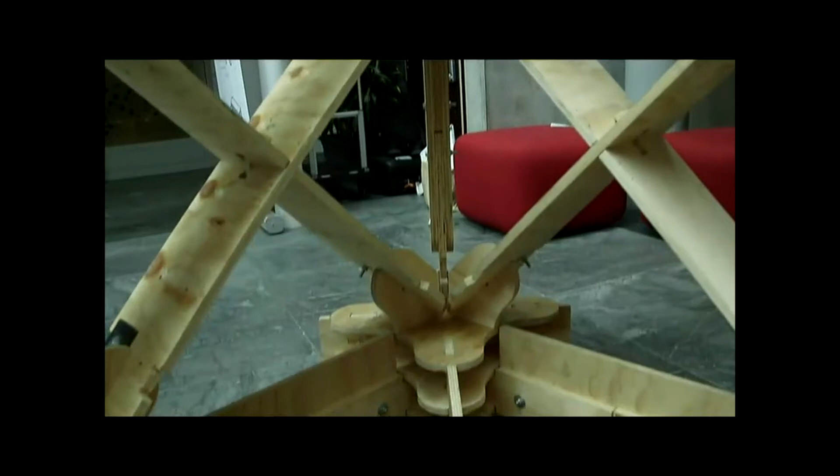Prefabrication and modular construction can help to alleviate the capacity constraints that our sector and construction is facing. We're talking about lots of automation, artificial intelligence, edge devices, cloud computing, thinking about how we can transform how we build in New Zealand. We are able to deliver building faster, safer, at higher quality, and friendlier to the environment. 3D printing, we want to get it out of little plastic objects into real buildings, and that's probably going to happen. If you want to be part of this, work with us. We're losing more people every year through retirement than we are gaining through new entrants coming into our industry. And we've said, let's just talk about digital fabrication, because some of this is real and we can exploit it today. Yeah, if you don't prefab, you're a moron. I thank you again for the work that you do in your industry, in your firms, in your workplaces, and the work that Prefab New Zealand does on this incredibly important task. Thank you.

Cool, so that's our little highlights video, and we've got a bunch of our own videos plus our members' videos on our YouTube channel, so have a look there sometime when you've got some time to burn.

I should mention also in the video that wonderful tidbit about if you don't prefab, you're a moron. That's James Murray Parks from Brookfield Solutions. He's an absolute brilliant mathematical savant, so really interesting guy. What you would have noticed also is that there were a lot of shots of timber.

We are material agnostic, timber, steel, concrete, but there is a huge amount of interesting stuff happening in timber, and I'll show you some things in a minute.

The other thing you would have noticed is that we have a really equitable balance of women and men presenting at our conference, and in the construction industry that's really rare because the visibility of women is about 1 in 8 or 12.5%, so it's pretty low. So we're trying to do our bit to help move that up the ranks.

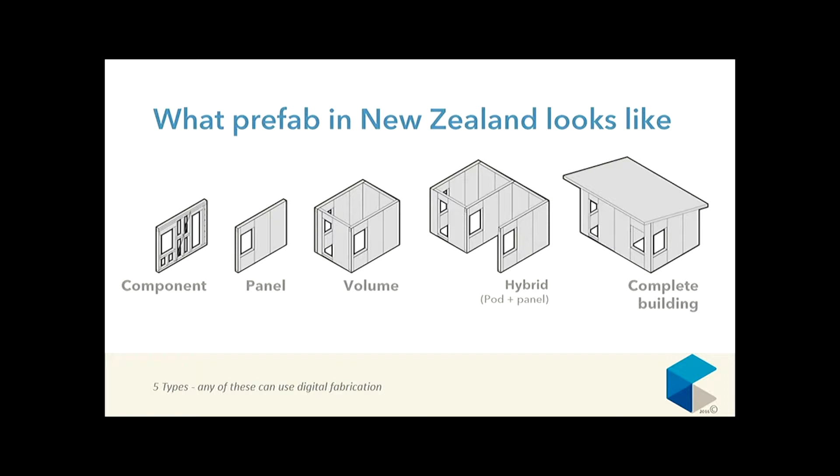We have a bunch of information on our website, which is all one-page infographics. We think if you can't say it in one page in drawings, it's not really worth saying. So feel free to download that kind of stuff, or else we've got it up here.

But when we talk about the reasons for using prefabrication, we talk about primarily improved quality. As soon as you take something off-site into a controlled yard or a controlled environment, it's about controlling the outcome. It's about tighter tolerances, and if you've got tighter tolerances in a better fit house, then you're going to have lower heat leakage and reduced running costs. So this is the ideal scenario.

The second one, of course, is time savings. There can be quite large time savings. Statistics are about 60% of on-site time can be saved. And they say the fastest way to save money is by saving time. So although people want that cost saving up front, it is buried down beneath the quality and the time savings and other qualitative savings, to be fair.

It's quite hard to measure some of these things, and we're trying to work with quantity surveyors around this, around life cycle costing, and how do you put a number against saving people's lives when they fall off the end of a roof jig at grade rather than at height. How do you put numbers around reduced noise and disruption and transport and dust at site?

So if you live in a large housing development and it's a staged development, you would prefer that the construction next door to your bedroom window happen faster and less intrusively. So in some cases it's worth looking at prefabricated solutions for those situations.

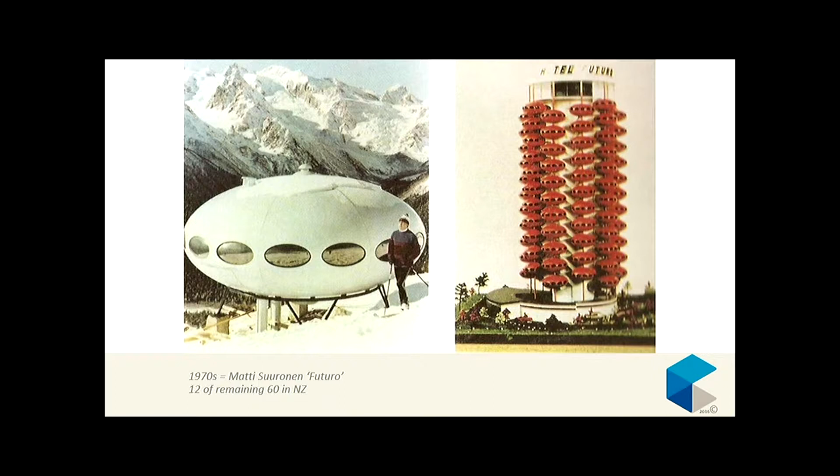So clearly we have a rich history in prefabrication, and it goes right back to the Treaty House, and even before that we like to track it right back to pre-colonial bundling of raupo at the side of the wetland. So we've got a couple of hundred years to draw on.

But as for today, here's a quick little bit of eye candy about what members are up to today, and some of these might be familiar. So I'll just go through the component, panel, pod and complete building.

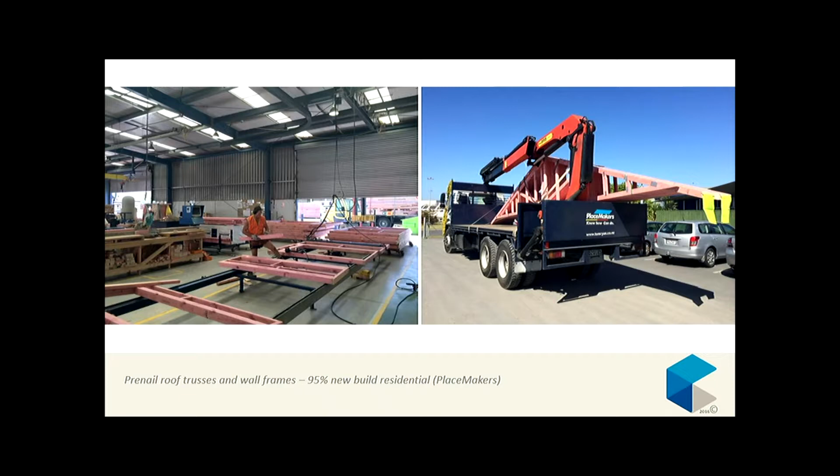Of course, 95% of houses start with pre-nailed roof trusses and wall frames. At some point, this was thought of as a wacky idea. So the really nice thing is that we can now see how small incremental change can take place. And then there are the odd wacky ideas.

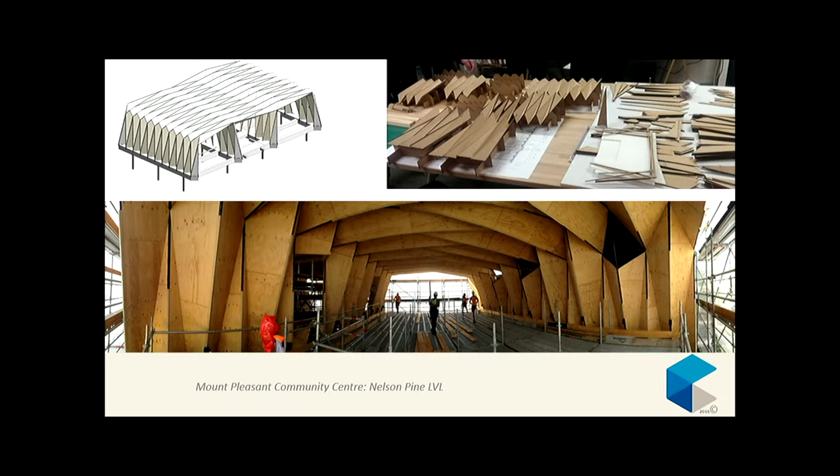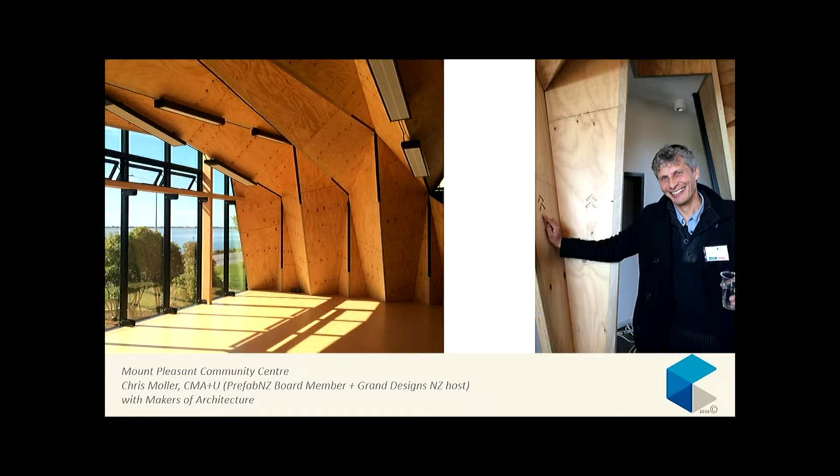So has anyone been to the Mount Pleasant Community Centre? Claire, I hope you have. So this is a really beautiful building and it is available as a community centre, as a venue to hire. This is made out of LVL from Nelson Pine, and that was put together by Lee's Construction, I think. One of our board members, Chris Moller, who fronts the Grand Designs Show, was a key design architect in that project. Has anyone seen that Grand Designs Show? Excellent. So that is a really good vehicle to beam innovative construction into people's living rooms or wherever you choose to watch it. Cool.

Moving up the scale to panels - this is where I think we've got a lot of really exciting things happening. Here's a little glimpse at the Concision factory in Christchurch.

This uses a mechanised manufacturing approach for panels, used quite a lot in other countries. In Germany, Japan and similar countries, 10 or 15% of all housing is made using these methods. This is basically 3604 in a factory.

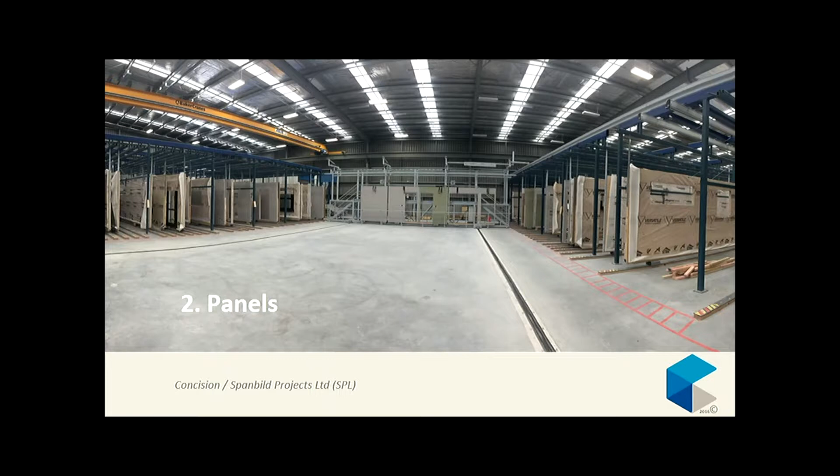These panels are made on flatbeds. They use butterfly tables to flip them over to do the other side. The smart fit windows are put in while they're hanging, and then they go to site in vertical racks. Here you can see them coming off one of these racks on the back of a truck. You can get a whole house onto the back of a single truck or with a trailer, and the whole house can be assembled and watertight in one afternoon.

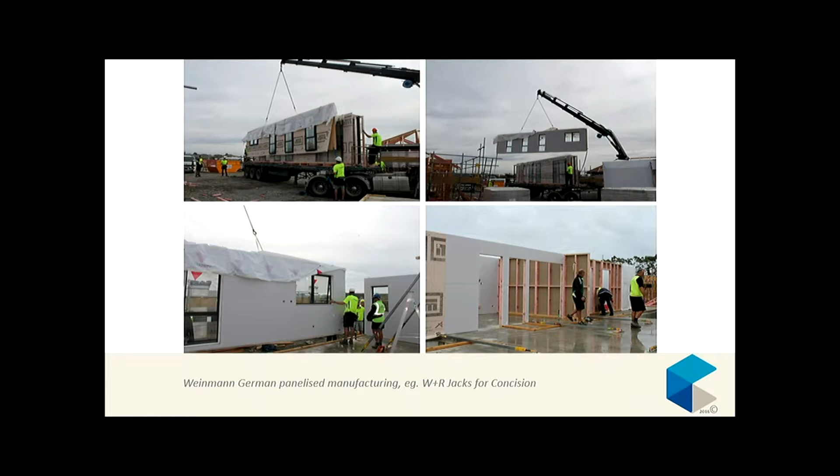There are other types of panels like SIPs, structurally insulated panels. There's lots of three-letter acronyms, and I think of these like Eskimo pie sandwiches - an oriented strand board, rigid insulation, and another oriented strand board panel. So it's structure and insulation fabric all in one. There are New Zealand-made SIPs coming out of Cromwell from NZ SIPs at the moment.

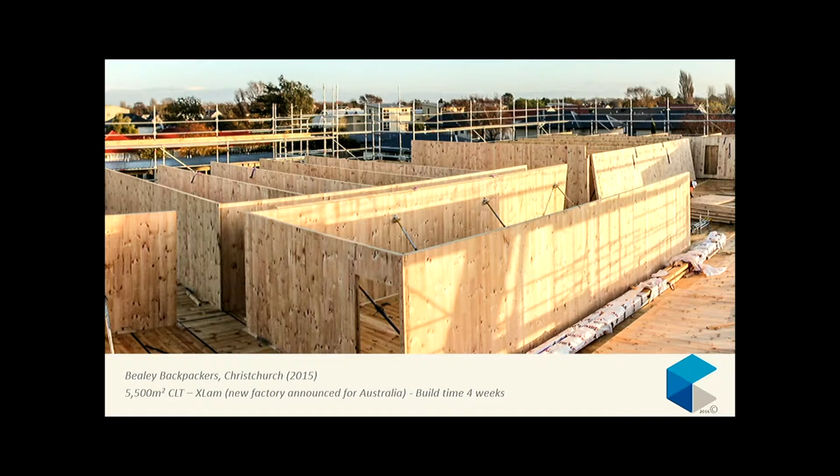I'm sure many folks would have heard of CLT - it's a little bit flavour of the moment. Cross-laminated timber is a really great way to use a low-value timber like Pinus radiata and turn it into a high-value product. It's essentially like a giant plywood where the pieces of lumber are set at 90 degrees to each other, and you can have as many layers as you need.

This is an example of the backpackers in Christchurch, the Bealey Backpackers, which is a really great use for student accommodation or a backpackers building. It's a very durable wall product, and here you can see it's just clad to look like any other building around - it's really beautiful when it's revealed. It's not always exposed, but there are fire treatments which allow it to be exposed. I think maybe the hallways it's exposed in too.

I'm sure you'll be familiar with this building, part of the University of Auckland suite. What was interesting with this site is it's really constrained, so there wasn't a lot of room to spread out in terms of traditional construction.

We don't have a lot of examples in New Zealand of volumetric construction. Stanley Modular have done most of them - they did this building, and they also did a whole wing of the Chateau Tongariro as early as 2005. So we have been doing these things for a while.

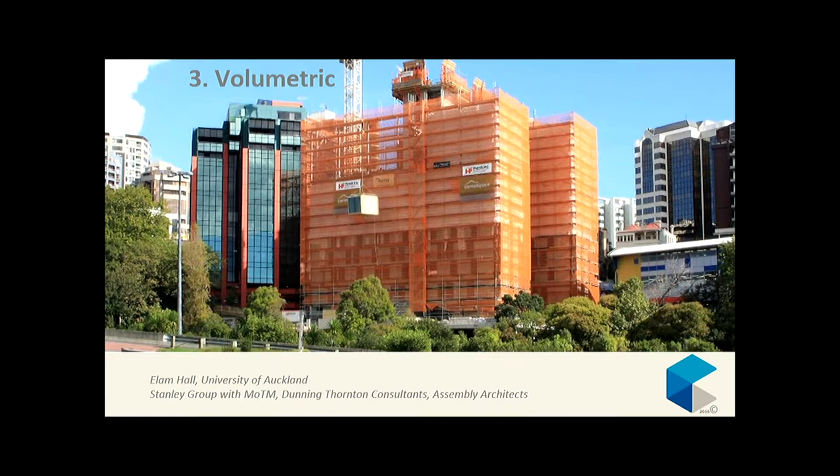468 of these bedsit volumes were made in Matamata and brought to site, where they were stacked three high, and then an interstory floor was poured. This was set up a bit like a chest of drawers - there was a traditional frame, and then the modules or volumes came in just like drawers. So it was a combination of traditional and prefabricated construction.

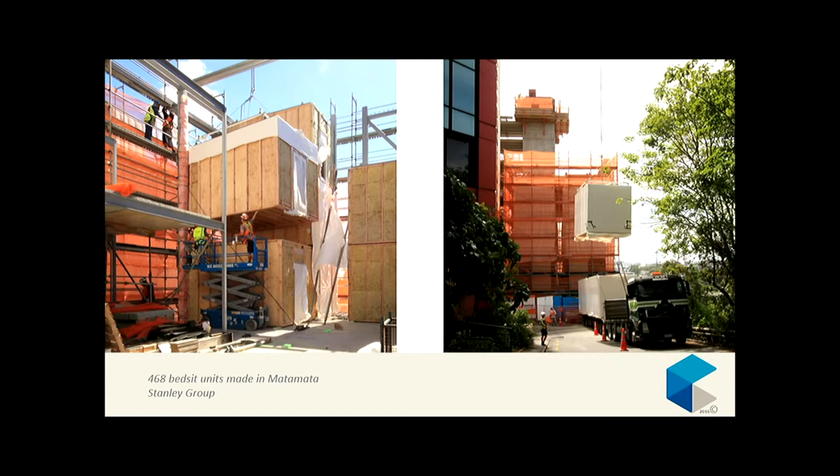There are other non-structural pods out there, including bathroom pods. At the moment we don't have a huge number of bathroom pod manufacturers, so if anyone wants to start a facility, I think Auckland's ripe for it.

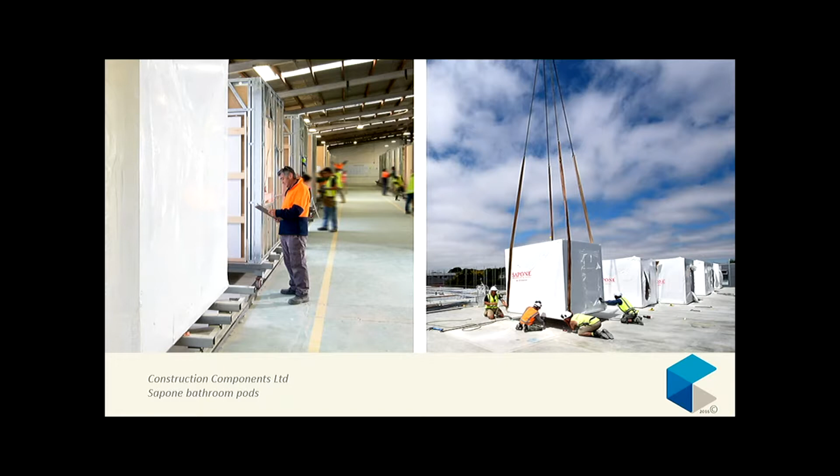Construction Components Limited is in Christchurch, and they have this line of Sapone bathroom pods, and you can see these coming in. These are typically used in hotels and other residential multi-res situations, accommodation.

Now, the one that particularly appeals is the kind of pod and panel mixture, the hybrid, and the best example of this is the First Light Studio project, which came out of Victoria University of Wellington, and they sent this to the Solar Decathlon competition in 2011.

I'm sure folks here will know about Solar Decathlon. This was the first team from the Southern Hemisphere - I think the Aussies have got on board since then. But they came third out of 20 teams, which was great.

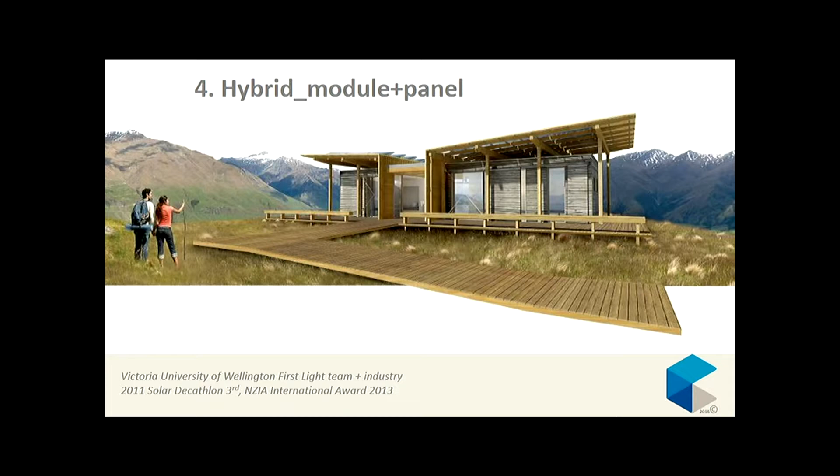All they had to do was make a house, package it up and send it to the States, assemble it in a week, display it through 10 competitions, and then pack it down and bring it back. They did that by putting it through 6 containers. There were volumes, and then there was an interstitial space that was panels, the dining space.

I think what they did really well is they managed to herd about 40 different industry sponsors. They did a really good job, and they of course got Meridian on board at the end there.

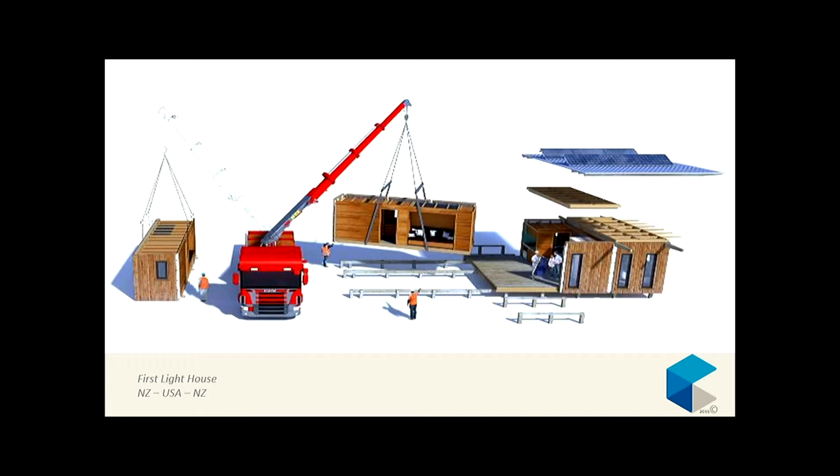The other thing that was really interesting is they had it on display on the Wellington foreshore, at Frank Kitts Park, and over a two-week period about 40,000 people went through it. There was huge interest and long lines at lunchtime with people wanting to really experience and understand what a highly sustainable house felt like.

That first typology, the complete building, is the classic transportable house, and this one we like to think of as a bit of affordable architecture. It's a bit of a baby between a couple of our board members, one being third generation Keith Hay Homes, who make fabulous homes in terms of having a good manufacturing system. They're not always the most beautiful homes, which is why it's lucky they mixed with Andre Hodgkin from Architects, who traditionally does very high-end houses. So together we got a hybrid, if you like, of affordable architecture.

This house on display, the Park Terrace in Christchurch, was available, I believe, for about $300,000. Other folks like Concision in Hawke's Bay and Hastings have built facilities that can fit the manufacture of about 12 or 14 small buildings, whether they're rural police stations, school classrooms, or small houses. And of course there are the lovely architectural follies like the Atelier Workshop one, which was the Port-a-Bach, a refurbished container. Hopefully we'll see a bit more of those wee bachy solutions.

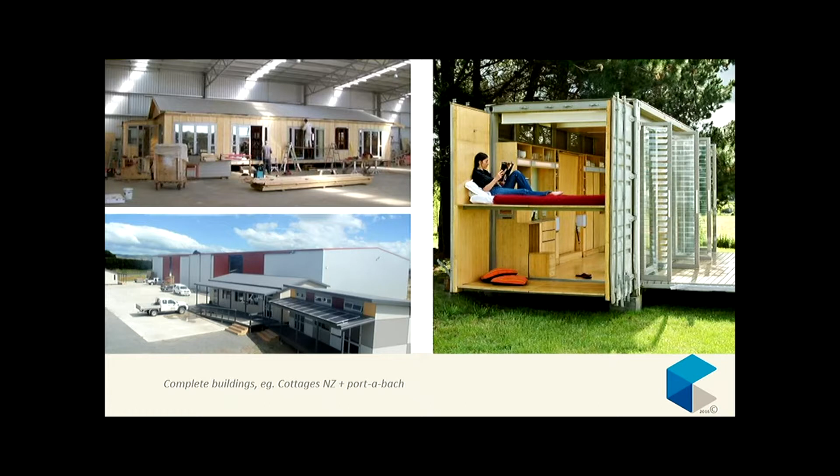So that's a quick snapshot of what's been happening locally. There's a huge amount going on in terms of medium density housing too. You'll be familiar with the grounds, I hope, at Hobsonville Point, which is a medium density example, and we're seeing a lot more now with Housing New Zealand using cross-laminated timber.

Just to quickly show you what's happening around the world, a few years ago there was an exhibition in New York called the Home Delivery Exhibition, and a really great book came out of that, which is probably in your library. That's probably the most concise history of this space that I've seen.

There are things like Dwell magazine and their show that they run every June, July in LA. So if you're in that area at that time, it's definitely worth seeing. They quite often have houses as part of that show.

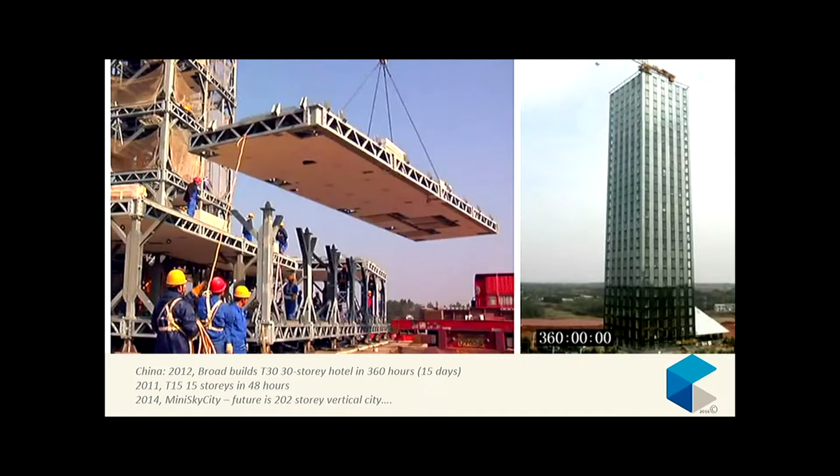Out of China, of course, we're still captivated by the work of the Broad Group. Has anyone watched these videos on YouTube? Like 30-storey buildings that go up in 15 days, and they've done an 80, 90-storey one, Sky City, mini Sky City. You can have a look at the videos and things they've got on there. They're really fascinating panelised assembly. They do have a very large factory at the foot of these buildings, but the idea is that it can be transplanted around the world.

Now, just like what we said before around show housing, what we can learn from Germany is they're very good at speaking directly to the consumer, and I think in New Zealand there's a lot we could learn with that. We don't often treat our consumers with a lot of knowledge, but in Germany they do, and as a result the consumers demand a highly sustainable product, to the point that their high-end houses even have demagnetised steel beams in them. They really take it to the nth degree.

So there are these great show housing villages like this one south of Munich called Bauzentrum Poing, and there's, as it says, 54 display houses. These are amazing houses because all the walls are like 300 or 400 mils thick, and they use fabulous timber technology like blown-in insulation made of wood shavings and all sorts of sustainable methods. Everything's on display, full sections of their construction system are available. Anybody can look at them, and it's a really great system.

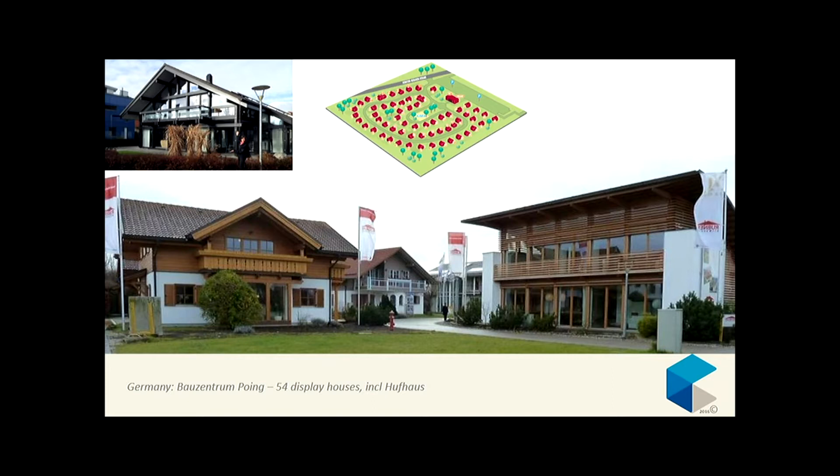In Japan, they're really good at talking to their consumers. They've identified that women are the target market, so they angle all their research and development and information towards the women who are making those purchasing decisions.

They have these R&D facilities, essentially the front end of the manufacture, where the house comes out the back. You can see impact testing of facade materials, fire testing of materials, and experience different seismic resistance systems, including base isolation foundation systems for regular houses. It's phenomenal. People pay an 8% premium for a prefabricated house because they've found it's more highly tested, and people are demanding the quality.

They also come with 30-year warranties, and these warranties are kept live by having the company come back and do tests or examine the house every year. Then the clients have to do those upgrade solutions or whatever it is they need to do, and that keeps the warranty live for this huge amount of time.

And of course, being Japan, there's a lot of robotic manufacture, a lot influenced by car manufacture. There are, for example, Toyota homes, Panasonic homes, Sekisui homes - companies that started off in chemicals, electronics, car production are now producing houses. They say there's 2,000 parts in a car, but 20,000 in a house. Every single house looks different.

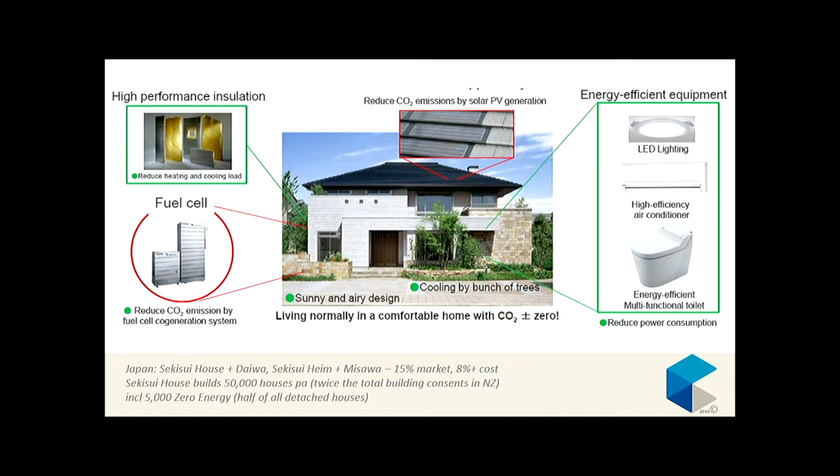What you're looking at there is a very European or North American influenced style, but a lot of them are 2 or 3 story row houses or conjoined townhouses and things. And of course, they're great with their tech - integrated PV panels in the roof tiles, self-closing toilet seats, everything you could want.

Now I've got a couple of slides about Sweden, and this first one's about their Million Homes program. For those that don't know, in the mid-60s to mid-70s, the Swedish government acknowledged their critical housing shortage, and they set out to do the Million Homes program.

So that's 10 times Kiwi Build, with a population of 8 million people, twice our population. So it's really 5 times the scale of what we're thinking of doing here. Whenever we have doubters around what we're trying to do with Kiwi Build, it's good to look at how things have been done in the past.

Now, there's not a lot of imagery, but they did sometimes set up this kind of panelised concrete scenario. They had public transport routes in place first, but they also transformed the way they deliver traditional buildings. As a result of that Million Homes program, instead of components, pre-nailed roof trusses being standard, now closed-in panels are standard.

That's a really interesting lesson, I think, for New Zealand, and I would hope that we will come out of the Kiwi Build transformation with a kind of 10, 20, 30-year vision that we move into more panelised construction.

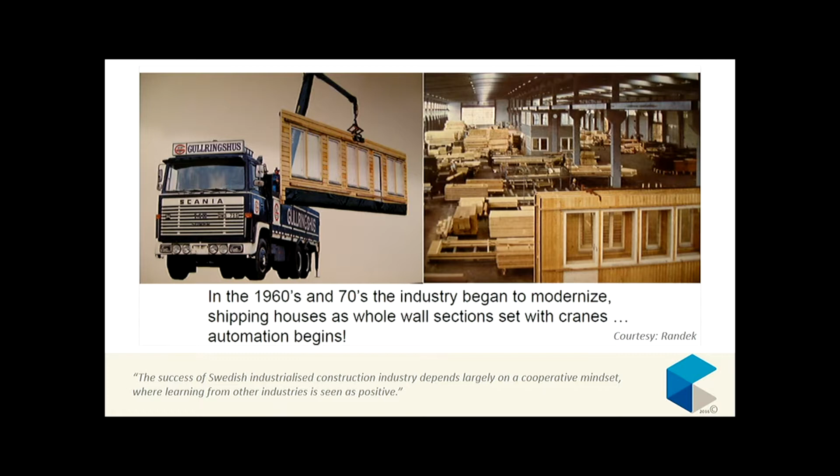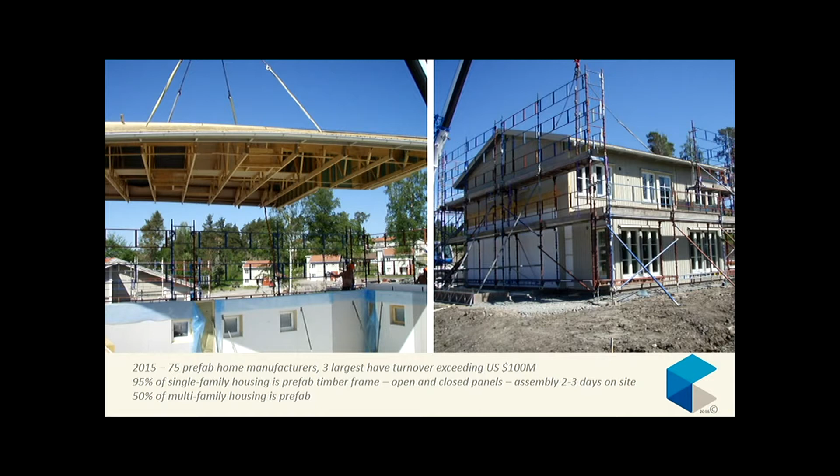And even the roof elements are coming to site fully finished. So you end up with what looks like a fairly standard house, or that might even be a duplex, and then it's all watertight really quickly. Then you can take as many weeks as you like to fit out the interior.

The other thing I thought was interesting about these folks is they're catering mainly to emergency housing, social housing, affordable housing, and multi-unit projects. When it comes to doing emergency housing projects, the whole material supply chain chips in with reduced margins, so they can produce a much more affordable housing product. I'm not sure that happens in New Zealand yet, but I thought that was a bit of a brilliant idea.

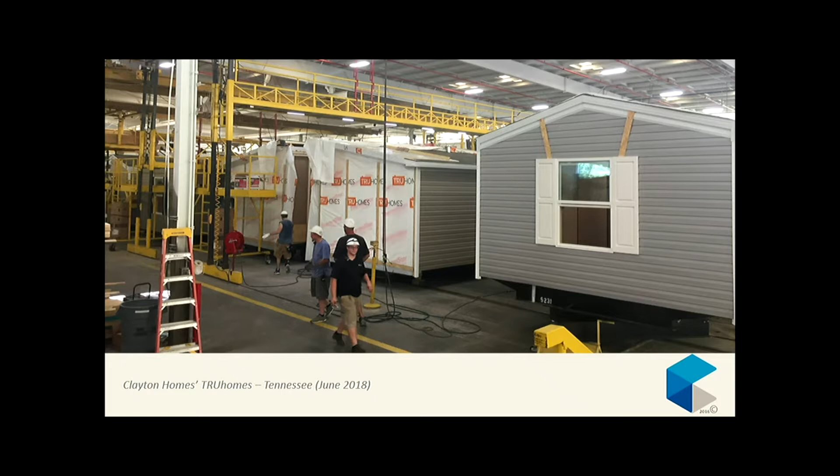Really interesting. I'll skip quickly through this because you can find out about PrefabNZ by going to the website. We have a directory, like I've said, so that's good. There's events, so you can come along to those.

Lots of downloadable resources. We had a really good media avalanche around our collab in March, and we also have this huge mountain of resources that are all freely available. So the things that I think are useful if you're out there in the industry is the glossary, for example.

There's a little bit of stuff around the roadmap, what we're trying to do. If you've got clients that want to understand the potential savings, the value case is a useful one - it talks about the 15% cost savings. All that stuff is downloadable on the website.

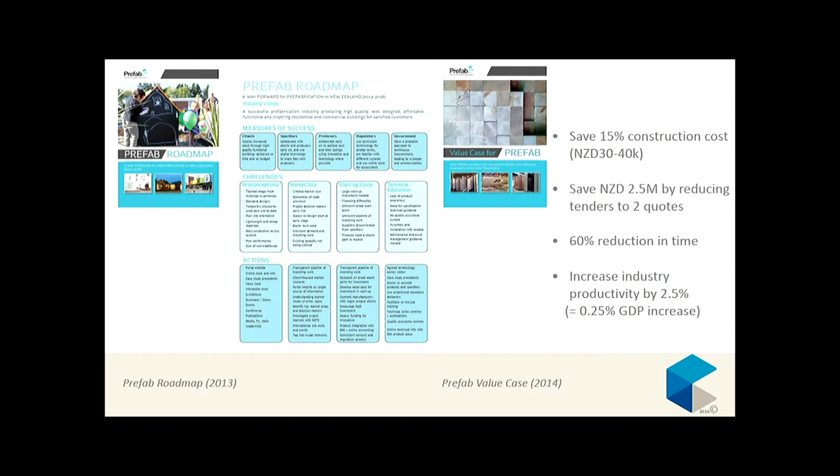The Hive was a demonstration village that we did post-Canterbury earthquakes, 2.5 years ago. We had 10 different houses up. We've tried to do something in Auckland and Wellington with medium density housing since, but we might be getting close to something - I'll tell you about that in a minute.

So that was really interesting. There was quite a good mixture of timber, steel and concrete - components, panels and volumes. Again, people really love to touch and feel and experience and understand housing, so I think there's a really good role moving forward for us to showcase housing.

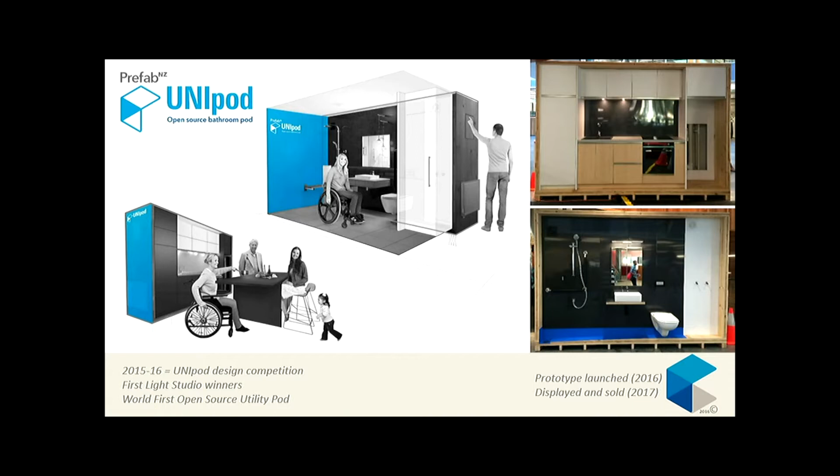We ran a little design competition a couple of years ago for a universal bathroom pod. This is now an open source pod, if you like - a utility pod, bathroom on one side, kitchen on the other. The winners were First Light Studio, the young folks from Wellington. We built a prototype that was displayed at AUT when we ran the collab there. Anyone can go in and use this.

It's all freely available. And because our members complain to us once a year when we run our membership survey about the 3 things that keep them awake at night - procurement, so getting scale in your orders, consenting, of course that's keeping everyone awake, and bank finance - we've done and are doing some continuing pieces of work on those areas.

If you're deeply interested, that stuff's in the project space. But this is the button I wanted to let you guys know about, which is what's leading to that potential next demonstration housing phase, and that's the Snug Design Competition.

You can find out about this on our projects page, but essentially we went into Auckland Council and said, hey, we can do 10 square metres without a building consent. In Holland, one of our board members keeps telling us, you can do 30 square metres without building consent. So we asked Auckland Council where we could find some middle ground to do an experiment for a backyard secondary house. They agreed that we could do anything up to 65 square metres and that they would pre-consent some of our finalists. So we've launched the Snug A Home in My Backyard competition.

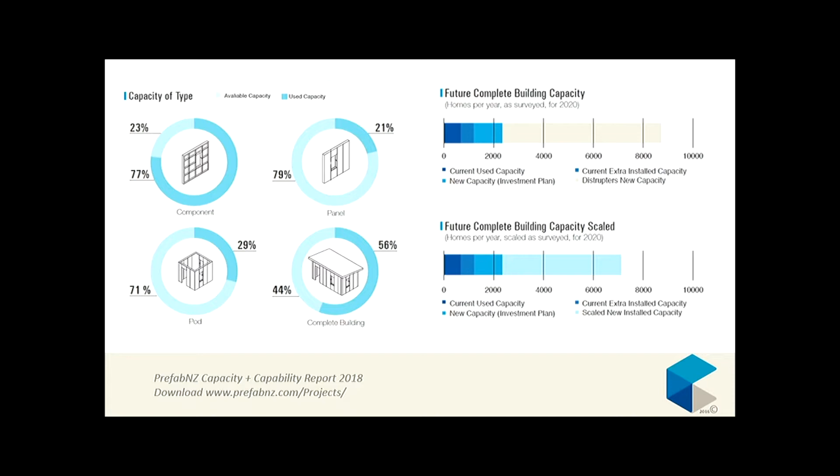Since then, we have found out about definite investment in prefabrication facilities, either extending lines or adding another manufacturing line, or building a whole new facility, that makes it look more like 10 or 11,000 units. And that's before counting any folks from offshore.

We also, in response to the consenting question — for those that don't know, it can take longer to get building consent than it can to build a house — we're interested in reducing and streamlining the process for alternative solutions, or ways to get people inspecting in their factory rather than at site. If you're producing many houses at scale, then clearly you need to be able to do some self-inspection. So there's lots of interesting stuff happening in that digital technology side with supporting building officials. It's happening just very slowly.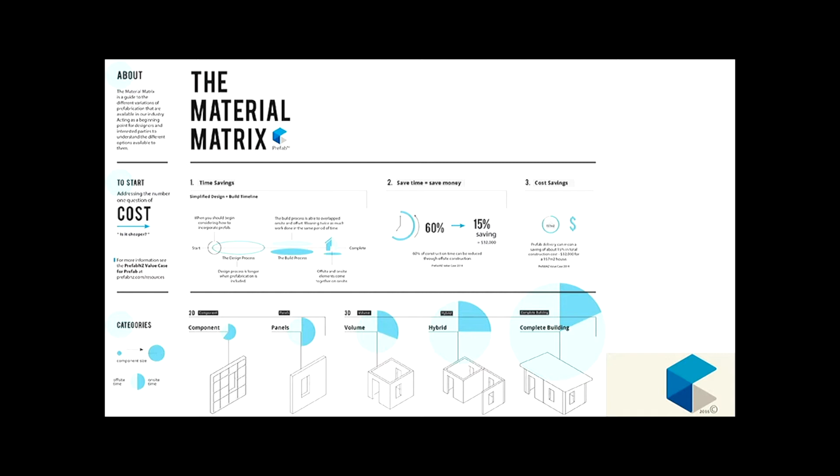So we put together this suite of solutions, a live document if you like, and it's available in our member resources, and it will update. There's currently not an agreed solution of how we deal with offsite. Auckland has a draft policy that sits in there. MBIE has some guidance around when to use product compliance like CodeMark and when to use other pre-consent tools like multi-proof. There is some work happening within MBIE to get more efficient consenting, which we are really crossing our fingers and toes for, and we need some clarification in some areas.

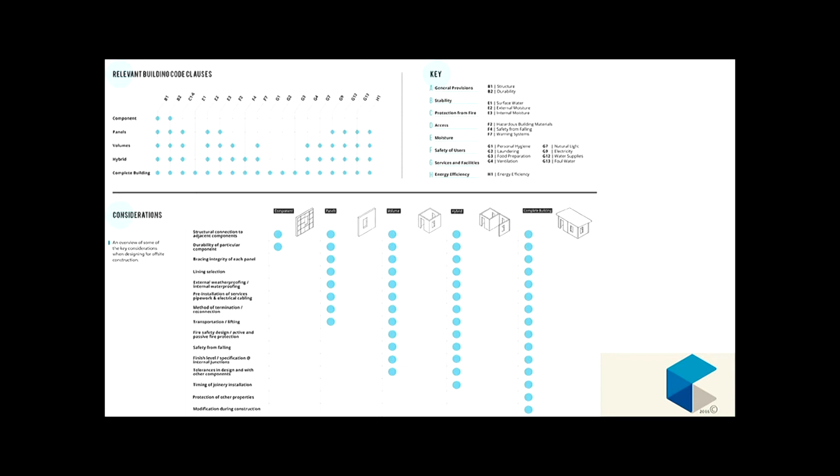So this material matrix is the PrefabNZ contribution to this Good Offsite Guide. I'm really happy to make this stuff available. It's currently in the members resources, but if anyone wants to see it, let me know and I'll email it to you. This is quite a good way to get started if you're wondering which material or typology is right for which situation and which building code clauses are relevant. So it's a good kind of specifier's entry, if that makes sense.

So just rounding up now, a couple of slides on what's going on. What we're seeing offshore, of course, is multi-storey timber buildings. Germany is good at this, and CLT has been used in Europe for about 50 years.

We are seeing more CLT buildings in Australia, especially through folks like Lend-Lease or Strong Build. We are getting some more close to home that I'll show you in a minute.

That top image is student work from here, University of Auckland - that was Yusuf Patel's work through EdFab. There's really interesting digital manufacture experimentation, and what's interesting is there were no fixings, so it's that kind of mallet and friction system.

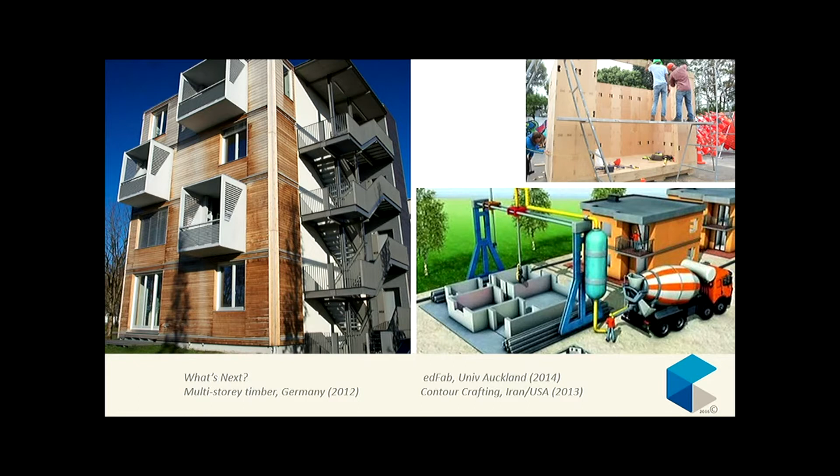The 3D printing space is really dominated by Eastern Europe and China at the moment. I'm not sure what experiments are happening in New Zealand around seismicity for that, but I think that could be an interesting space. There's certainly interesting material experiments happening with 3D printing, and we got to see in San Francisco what's happening at Autodesk around printing with metals and things like that, but it's really similar to what's happening at Callaghan, so we're not so different, which is good.

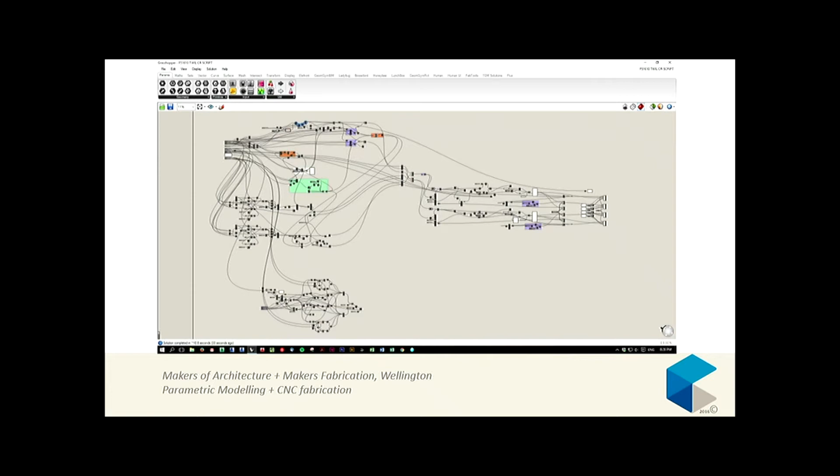And those of you who are on the tools will know that many designs start off looking like parametric models, and these then feed into new ways of thinking about bringing buildings to site.

So Makers of Architecture are a young crew out of Wellington, and they have a disruptive business model where they are both architects, designers and makers.

And to be fair, that's what's happening in your studio too, isn't it, Dave, in your secret basement?

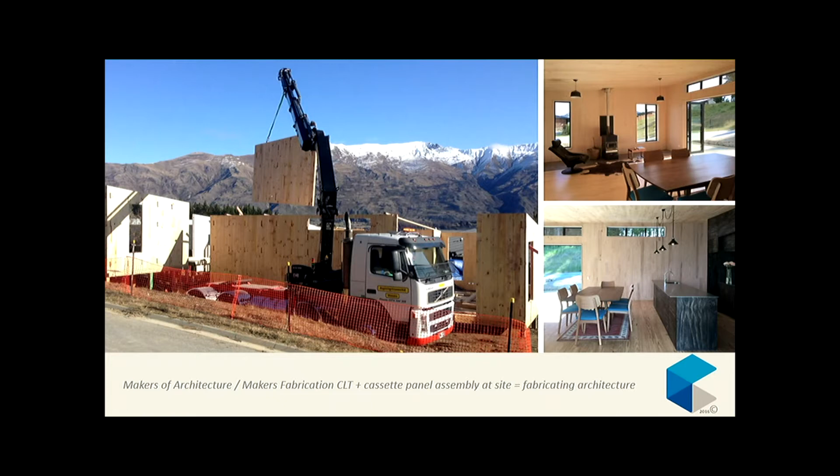So these folks, a really young crew in their 20s and early 30s, went out and bought a CNC machine and rented a space. They use CLT panels, and then developed their own kind of cassette system, which integrates battens, insulation, wrap, and cladding. They do everything right through to having their own construction folks to bring it to site. That fully integrated solution is what we see at scale offshore, but it's really interesting to see it done at a micro scale here. And clearly, beautiful aesthetics as well.

Now this is the interesting kind of timber stuff happening. Tall Wood is now an amalgamation between what was Tall Wood design integrated studio with Stanley Modular, who have been doing this prefabrication stuff for 15 odd years. So it'll be really interesting to watch that space.

That includes the building I mentioned before, the Grounds, which is that Nightingale thing - a 3-storey walk-up in Hobsonville. This is at site now, so you could rock up and take a look from the outside anytime.

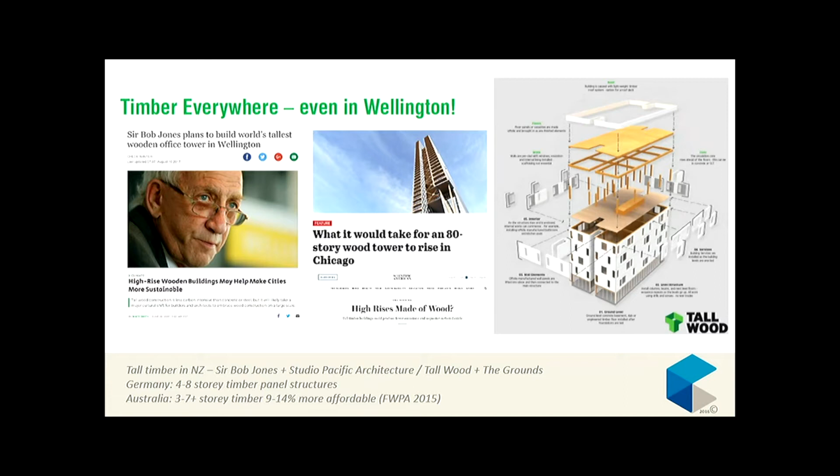The other thing that's grabbed the media attention is Sir Bob Jones' own design of 9 stories of mass timber, so LVL and CLT. Studio Pacific Architecture in Wellington is helping Bob with those finer construction details, and that's just at the construction tendering, building consent stage at the moment.

So we'll keep an eye peeled. Just a little nod - did anyone here go to the BuildNZ Design X event a couple of weeks ago? Okay, so that was really interesting.

We did a little innovation quarter patch, if you like, showcasing the work of students. There were some folks there from Unitec and Victoria, showing digital fabrication, 3D printing, where there was a little robotic arm going, doing a miniature system of that X-frame. So that was all very cute.

What was really interesting is that there was a massive amount of interest in people wondering what's this next evolution that's going to be coming up. And I think what's really heartening for the students in the room is that you folks will be our technology leaders - we won't just be paying you $20 an hour when you come out.

We'll be wanting to grab the really good tech literate folks, and I imagine that you'll be really well positioned to lead and influence the industry as you come out of university. So I think it's a pretty exciting time for us to weigh up different value of knowledge.

Last slide, pretty much. Just really in summary, feel free to engage with the information if there's something you're looking for. If you can't find it, get in touch, info@. The Snug Home space is going to be a public engagement face, so that's snughome.nz. And if you can't find it, the directory is a good place to go to try and find stuff. And that's us.